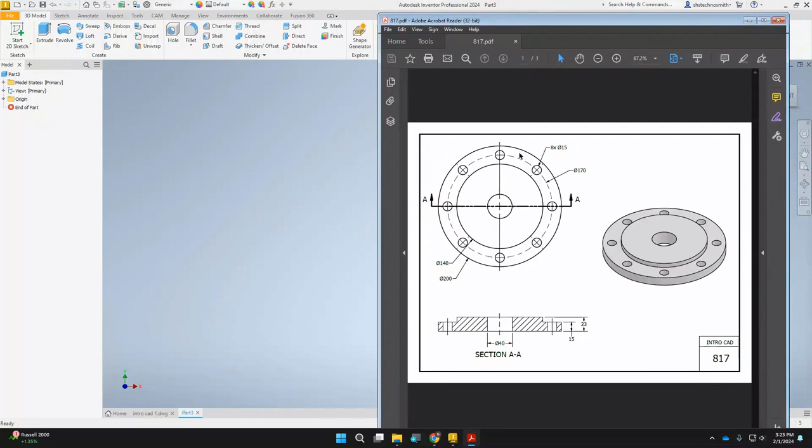Okay, this video is going to show how to make a circular pattern. Circular patterns are very common in manufactured products because they evenly space out the bolts or other fasteners around the object. So for this one, it's a little different because I had to redo the drawing sheet a little bit, but it should have everything we need on here.

So for this one, the key is in the middle of the circle. And so when I create this, I want to make sure that I am creating everything from that little dot. So I'm going to start off with a circle.

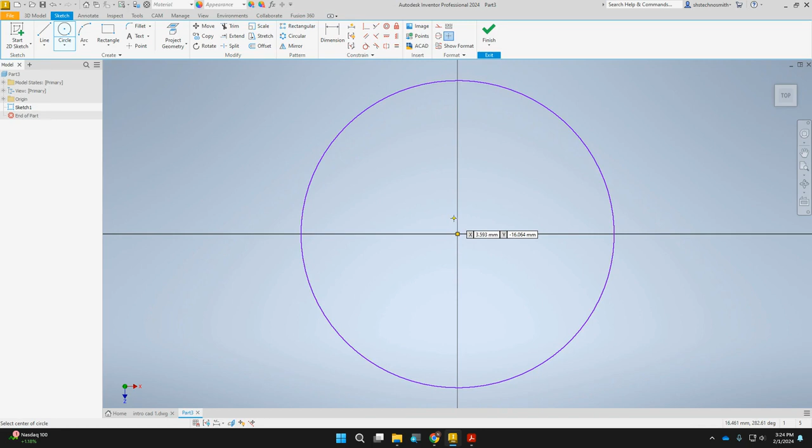Very important for my circular pattern, and I'm going to dimension this one. So the first outside circle is 200. I'm going to draw that outside circle at 200, put the hole in the middle of it, extrude that up, add this second one, extrude that up, and then do the circles.

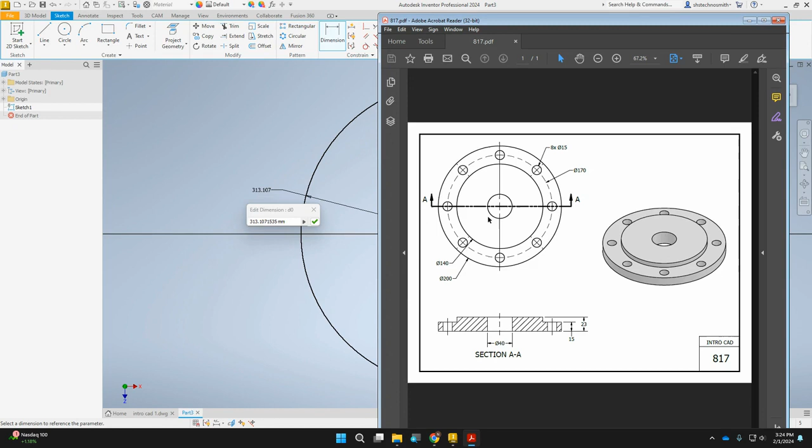Okay, so I have a 200 here, and that hole in the middle has a diameter of 40. So this becomes 200. And then when I create a circle here, in Inventor you might notice as you're moving, the dimensions are changing. So if you know that number before you lock it in, you can type it. So this is 40, and it'll automatically add that dimension there.

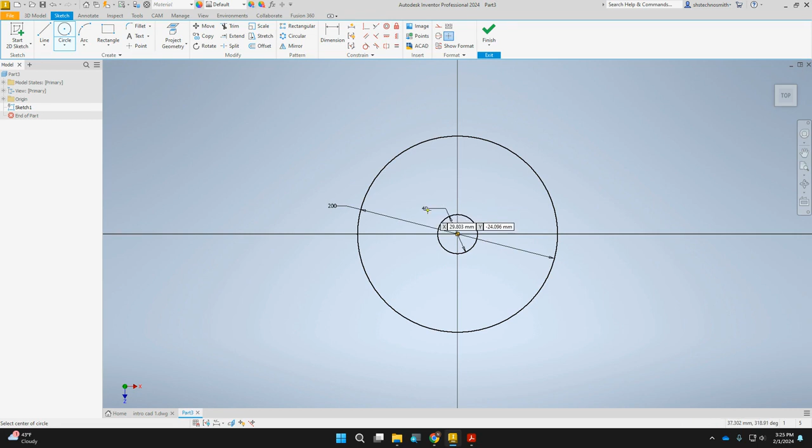So I'm going to finish my sketch. It zooms in way too far. Extrude it up - I have a thickness of 15.

There we go. So my next one, I'll create my pattern. I don't need to spin it around because it's a circle. I've got another one that's going to go like this. And then what I want is - that circle there, that's 140. I need to keep this one.

So I'm going to use what's called project geometry. I'm not sure which one, but I'll take that circle. That's going to allow me to only select this. If I hadn't done that, it's going to want to fill in my entire circle when I extrude.

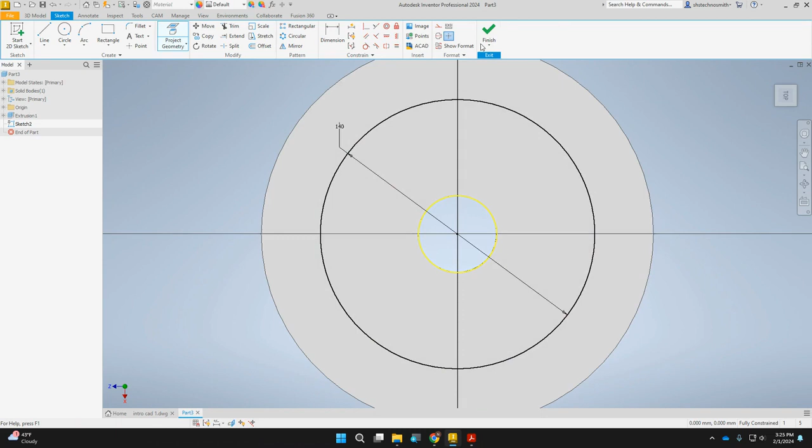So I can extrude here. When I look, the way it's listed is it's 23 to the top. So this space is whatever's 23 minus the 15 I already did. So I can just write in Inventor and say 23 minus 15. And there we go, so now I've got that with the hole in the middle.

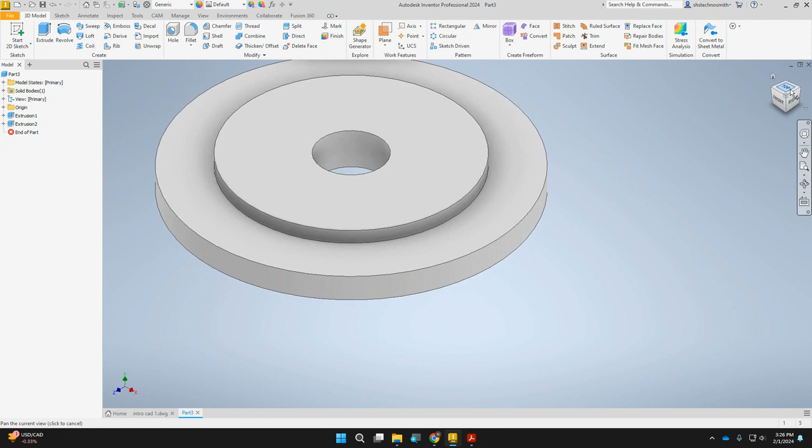Okay, so now I'm going to create another sketch on the surface. I'm on this surface here, so you kind of see like the top one is sticking out, that one's down there. It doesn't really matter what order you do this in - you could have done this circle after what I'm doing now, but it's the same thing.

All right, so in order to do the circular pattern, you'll notice that when it's drawn, the circles are on this little dashed line circle, and that's going to be helpful for us. I'm going to create that dashed line circle to put these circles, or the holes, on.

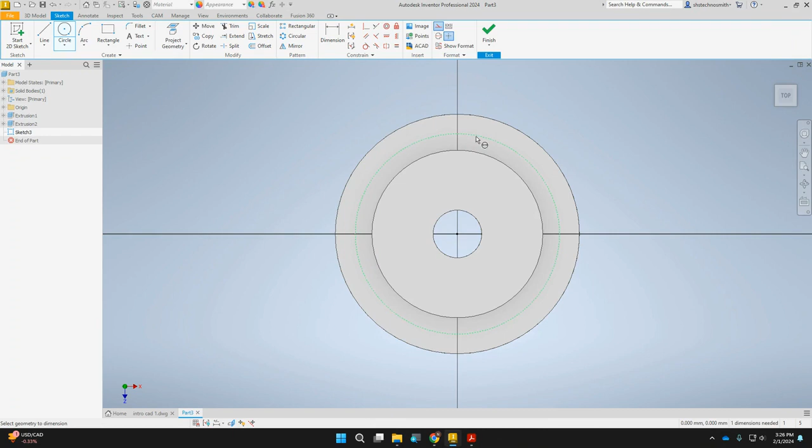So to do that, when I click on my circle command, I'm going to make a construction line. When I highlight that and draw this, that is now dashed, kind of like it looks like on this sheet. So that has a diameter of 170. You'll notice I'm not clicking on the dimension button - I'm hitting D on my keyboard for dimension.

All right, and then I'm going to do a circle, and I got to get out of my construction line. If you forget and you do something like this, you can just hit escape, highlight, and then bring it back. Okay, so I've got that.

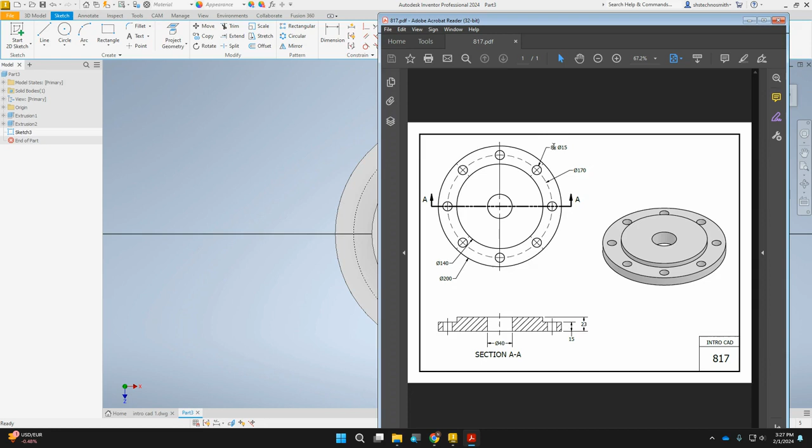And it says here, it says 8 times diameter 15. We have to multiply - this means there's 8 of them all the way around. So one of them is 15.

And it's still purple - that's because as I drag it, it moves. So I want this first one to be vertical to my center point. And now it's black, so I'll finish my sketch.

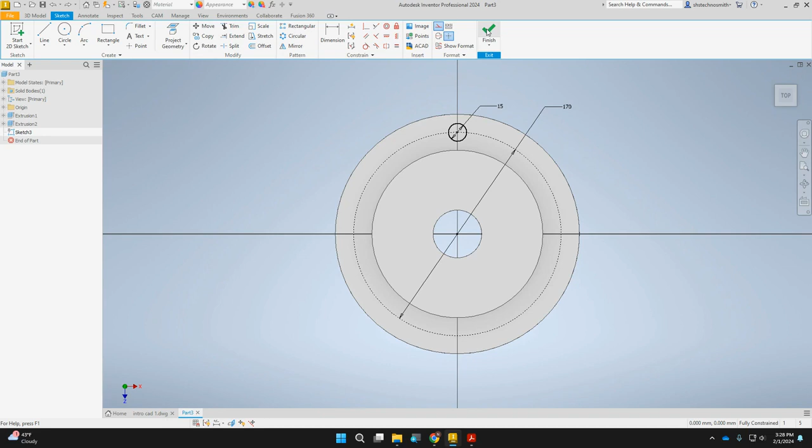Let me go back real quick. There is a circular pattern here in the sketch mode, but I don't like doing circular, rectangular, and mirrors in sketches if I can avoid it. This one I certainly can - I just find that it creates problems. Maybe I'm doing something wrong, I don't know. So I'll hit finish, and I'm going to use my circular pattern here.

All right, well before I do that, we got to hit extrude. We're going to cut it all the way out, we're going to make a hole. Now we can use a circular pattern.

So here we go, circular pattern. All right, this will pop up here. So kind of like when we did our mirror where we did a whole solid, we have 2 options. This one, we only want to pattern the individual features. So you'll see this is highlighted and it's in red - I haven't selected it, and this is what it's looking for right now.

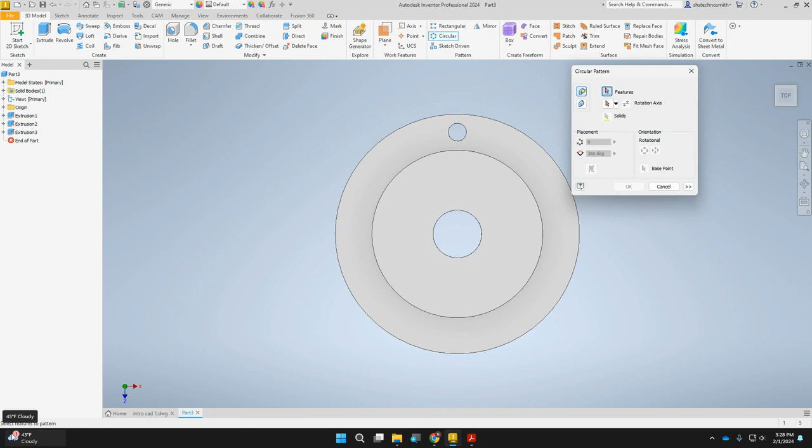Down here in the bottom left corner, right above where it says it's cloudy still because it's February, it says select features to pattern. So I'm going to click on that, and that's the only feature I want to pattern. The red arrow goes away, but it's still highlighting the features.

So now I'm going to click rotation axis, and I can choose any one of my circles because they all share the same axis. Then I have my placement - how many? So there were 8 according to that sheet. And then a lot of times it goes all the way around. If for some reason it didn't, you could play with that number, but you don't usually need to. And if you're not doing a circle in your circular pattern, there are options for how it patterns and stuff like that.

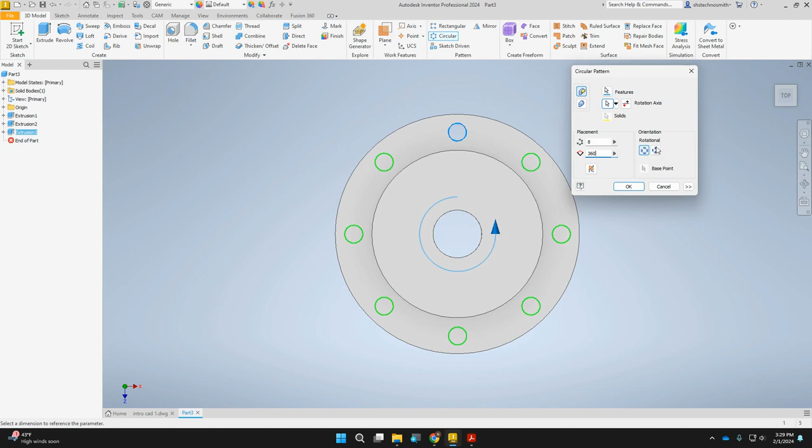There we go. Right, so we click OK, and it looks a whole lot like that. So that is 817.